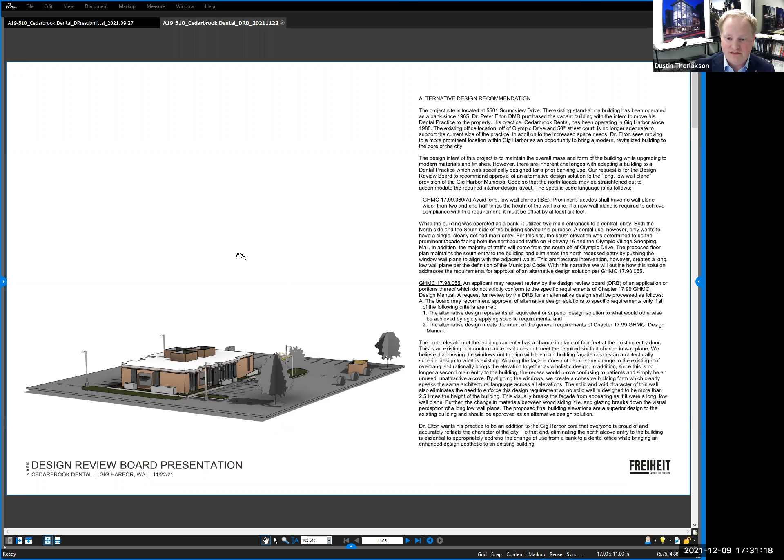to move his dental practice into this structure here. He's been operating in Gig Harbor for a long time, and just has kind of outgrown his space and really wants to be a member of the community and kind of enhance the aesthetics of Gig Harbor, and kind of have his dental practice right here in the center of the city itself.

So what he did is this building here, this is the existing building footprint here. It was previously a bank use. So as traditional banks that were built in this time, you kind of have those two entrances off of the common lobby and then bank tellers up on the side.

So there's actually a parking lot in the rear of the building here towards the north, which had its own separate entry, and also the main entry here on the south side of the building, which kind of faces the Olympic Village Shopping Mall and the area that we are proposing to use for our main facade.

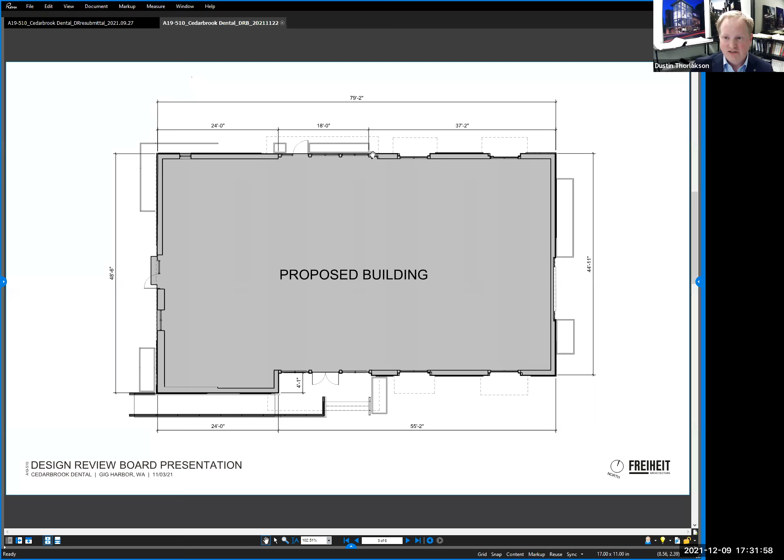Here's the proposed building here. You can see here on the north side, it's really just lining up that existing elevation, that facade, all the way across to make the interior of the space more usable for a dental practice. Having two entrances into this building for a dental office doesn't make a lot of sense and can be very confusing to people parking here in the back, even though most people are going to be parking here in the front, coming up this ramp to this new, redesigned, at least materially, entry here on the south.

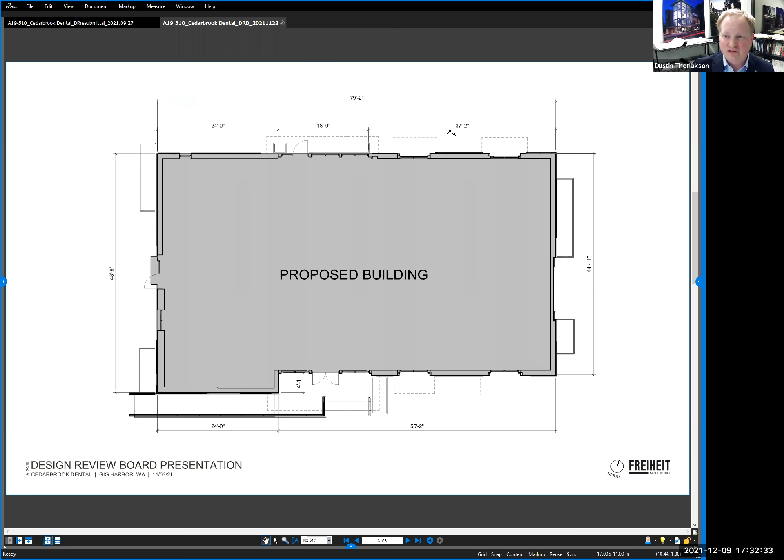As Kim mentioned, it's 79 feet 2 inches total in length. But what you see here is kind of broken up with the glazing. This is full height glazing, ground all the way up to the roof. So it is breaking up materiality across the facade. That's kind of what I'm showing here with these dimensions of the windows and kind of what's perceived as the wall plane.

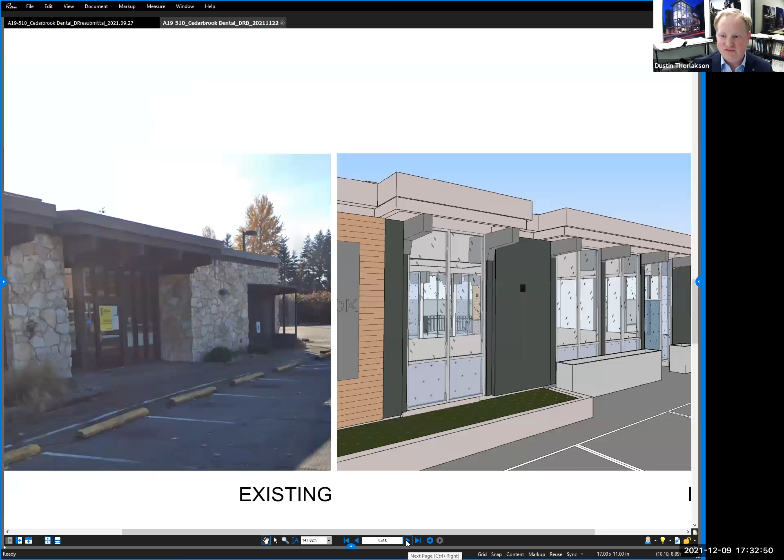Here's just showing the north side of the building here. On the left side is the existing condition. This is the alcove that we're talking about. It recesses about 4 feet back from the parking lot.

And then here on the right is kind of what we're proposing. So this recess already was fully glazed, and we're just kind of taking that glazing and moving it out to be in plane with the front facade along here.

In this rendering here, the dark gray is a tile type material. The brown is that horizontal wood, natural wood siding, and then obviously the floor to roof glazing. There's no change to the roof or the roof overhangs. The overall mass and form of the building maintains its original condition. It's really just taking this wall and shifting it out.

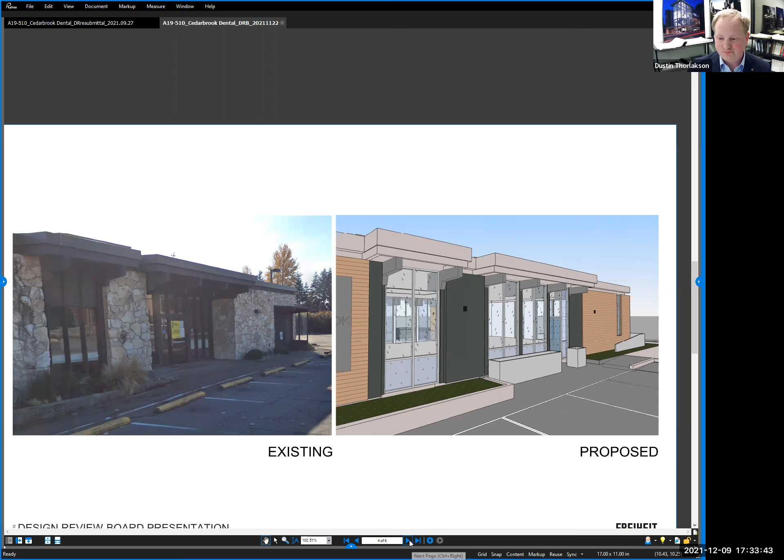Here's kind of a view from the other side, looking back towards the structure proposed here.

This just real quick is the elevation looking directly at it on that north side. If you were to look at this, I think the eye would perceive kind of the glass, the glazing, and the dark colored tile material as kind of one linear form, and then the wood itself being a secondary one.

So this diagram here is kind of showing how the change in material is in relation to the height. With that perceived extents of the wall plane, the perception would never be over the 2.5 height times the height, and therefore be in compliance with this alternative design solution here.

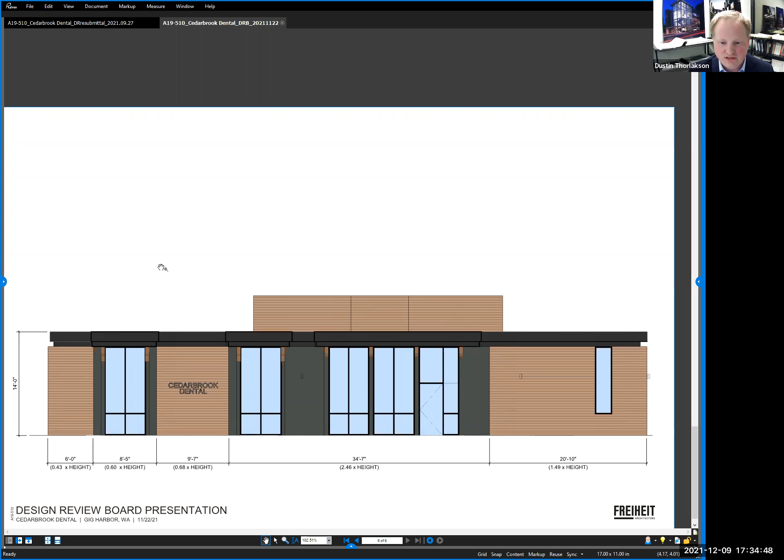That's the extent of it and the visuals that we have. I think Kim went through the kind of ideas and what we're proposing here fairly well. So if you have any questions, feel free to let me know. Thank you.

Okay, I'll ask Marlene or John or Larry, do you have any questions of the applicant?

The only question I have is where you guys are bringing it back out. Looks like you're adding some planting beds in front of the glazing, or are you changing the planting beds at all on the existing to the new?

The existing planting beds are going to be reconstructed just with the surround, so it maintains that same area. They're just going to be kind of enhanced with better planting in there, which is one thing that Dr. Elton really wants on the building.

And then here in the front, these are just kind of set on movable planters, which were put in there to kind of deter people from going into that recess, but they're just going to be there for kind of planters here in front of this glazing.

There is still a door going in through here, and that's going to be the entrance used for, Dr. Elton will correct me on the term, but basically if anyone has to come in on a stretcher or be wheeled out to their car, this is where they would park, in kind of the rear entrance.

It's a closed room, secure room. Yep, it's for our sedated patients.

If we sedate them in our office, generally it's not comforting to the patients in our lobby to walk sedated patients out the front with gauze hanging out the side of their mouth. So it's kind of a pickup site for their family members.

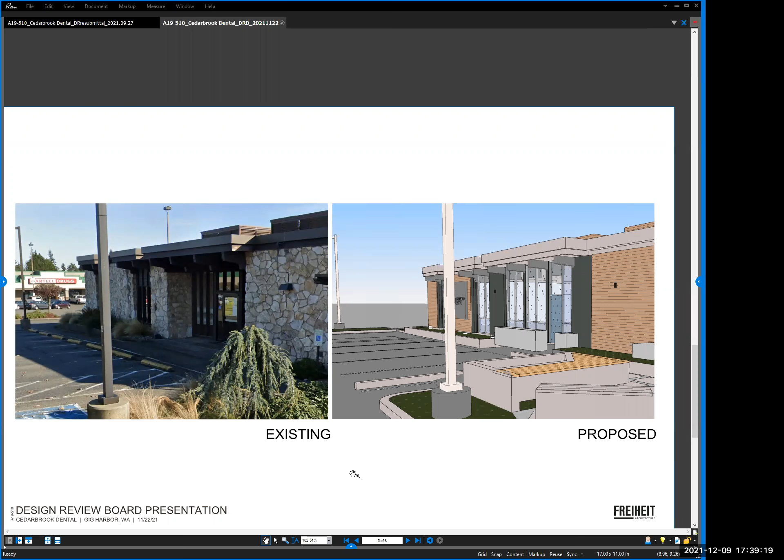Chair, yes it does. Dustin, it might be best to fully address the chair's question right now—pull up your most recent plan set and show what the site in totality is going to look like. But yes, the western facade area is going to be improved with siding material. There is going to be demolition of the drive-through, and that entire area is going to be improved with additional parking, landscaping, and pedestrian connectivity.

And then they have an outdoor common area that is in excess of the required amount of square footage, provided right there where his cursor is. That is all well prescriptively meeting the design manual.

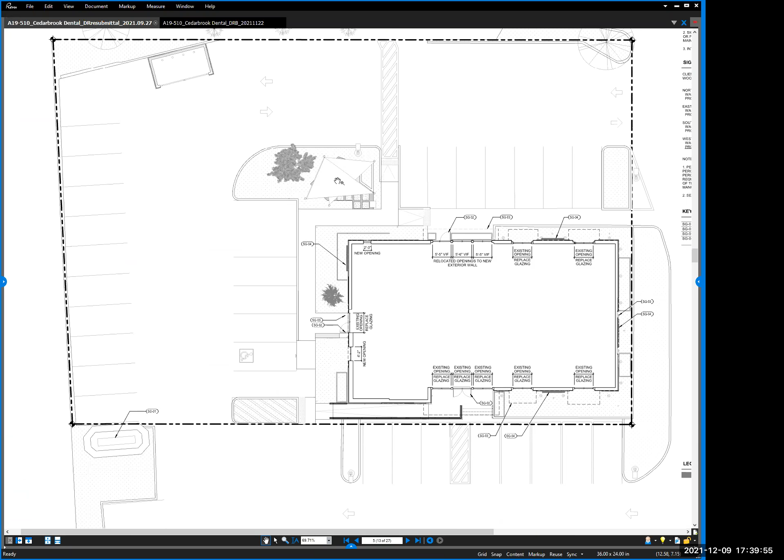I can't speak for other members of the DRB, but I would think they'd appreciate being able to see the whole project—it helps lend some insight to the scale of the change or the piece we're actually talking about. And it looks like, which is kind of what I had in mind, thinking how it would be redeveloped—I'm glad to see it would progress this way.

Any other DRB members have comments regarding those other elements of the site? Obviously they're not part of our discussion per se, but I think they do lend to how we look at that north side of the building. Okay, not having any comments. Any other questions for the applicant from the DRB members?

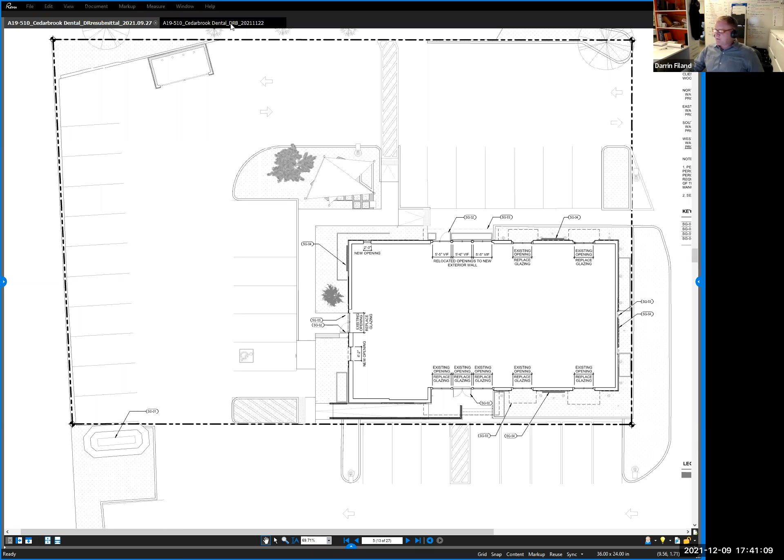Okay, let's go ahead and talk about the proposed solution then. I think in regards to the way staff have looked at this project, I would concur. My own thoughts on this are that the building, in one sense, is pretty modest—it's pretty low scale as it is.

I have always contended that the low long wall plane concept was really addressing big boxes that don't have a lot of interest. It's really not applicable in the spirit of that concept to this building, especially with the materials running from base to roof line—it really modulates the building visually with the glass, the siding, and the old stone that's on there. Obviously it harkens to some design standards of years ago, and going to more contemporary siding and panels with new glazing systems will modernize the building quite a bit. Overall it's at 79 feet or so.

This building is one of the smaller buildings within the development, and I think with these changes it would probably be one of the more attractive ones. So I don't have a problem with it whatsoever.

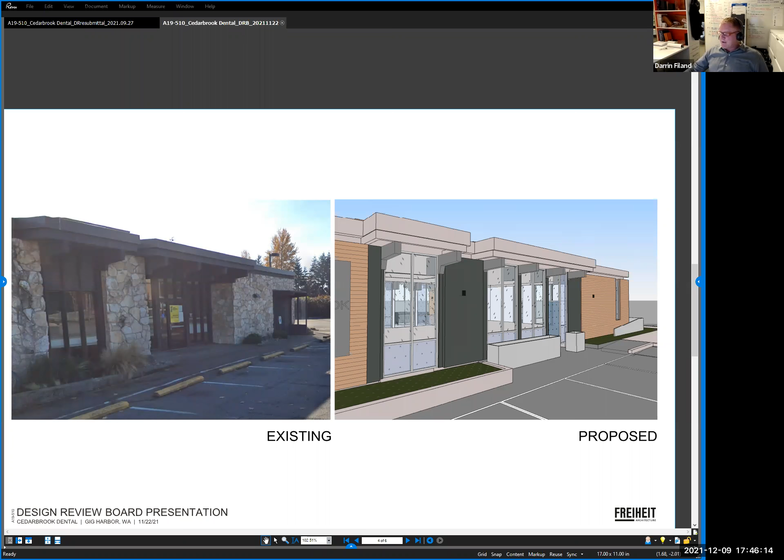That's as simple as the design review board process is in the city of Gig Harbor. So we encourage you to sign up for more projects, bring them forward. We've been bored lately, we haven't had anything to do. We appreciate it. This project sat vacant for a while, and there's always the potential for bad happenings around vacant properties. So it's nice to see that we can improve the center of this shopping center. There's been a lot of other improvements in the other buildings as of late, so this will be a really good positive injection of some good design work there. Good job, thank you, appreciate it.

Thank you, Chair. I can speak on behalf of my applicant to acknowledge that he's very anxious to be able to get this project underway. I know it can be challenging sometimes during the holiday season to get everybody on the board together, so really appreciate everybody's time this evening to be able to allow him to continue to pursue his building permitting.